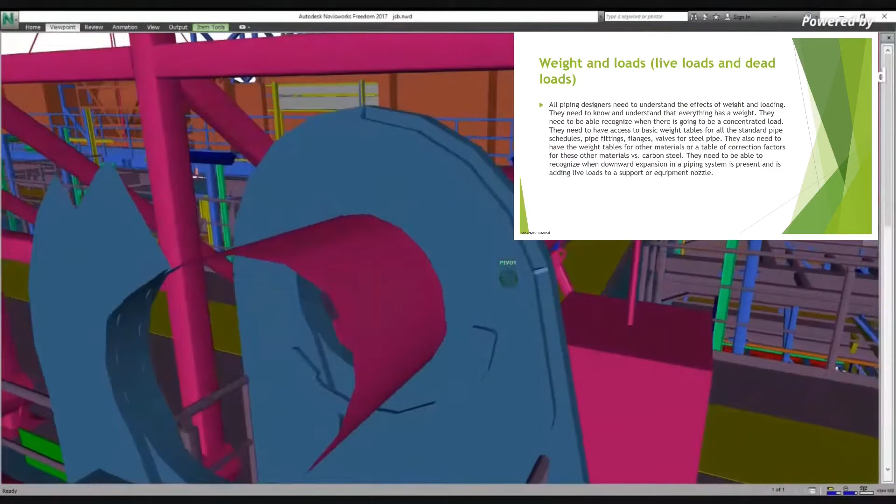The system is present and it's adding live loads to support or equipment nozzles.

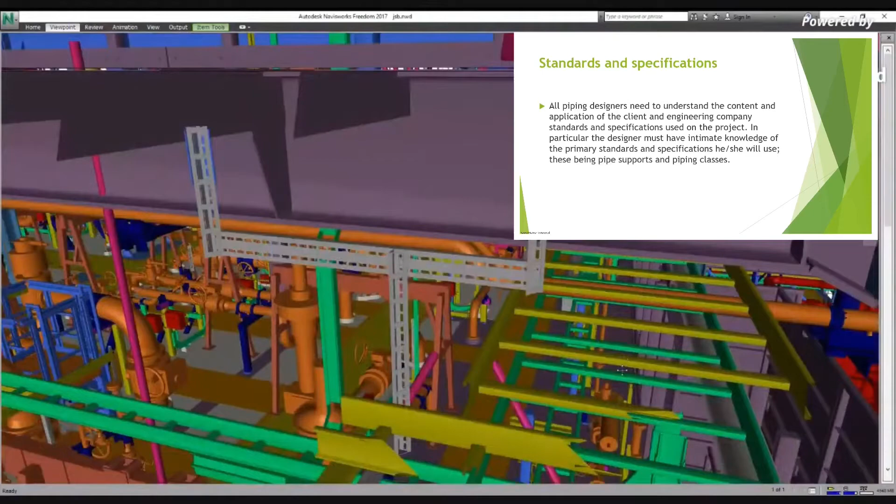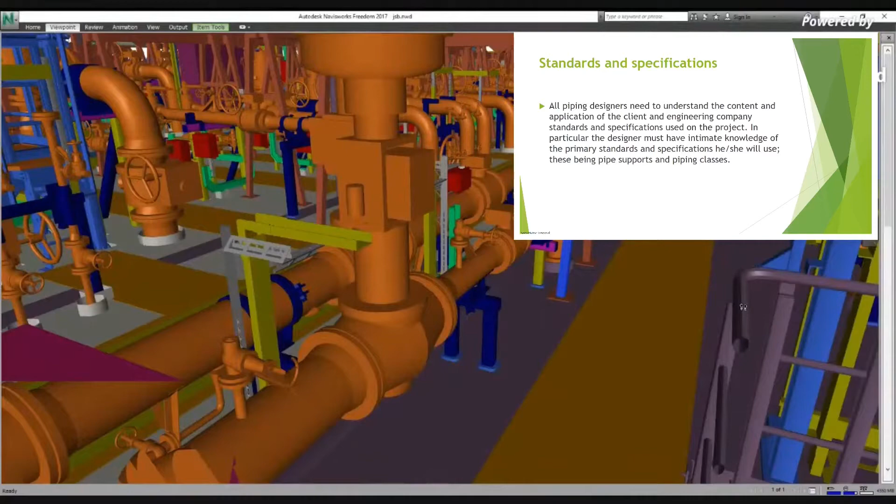The next one is standards and specifications. All piping designers need to understand the content and application of the client and engineering company standards and specifications used on the project. In particular, the designer must have intimate knowledge of the primary standards and specifications he or she will use, being pipe supports and piping classes.

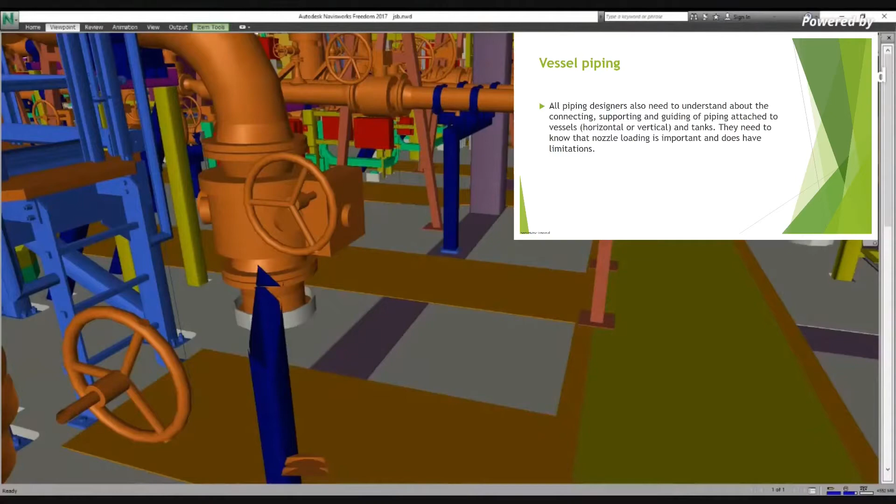Vessel piping. All piping designers also need to understand about the connecting, supporting, and guiding of piping attached to the vessel, horizontal or vertical, and the tanks. They need to know that nozzle loading is important and does have limitations.

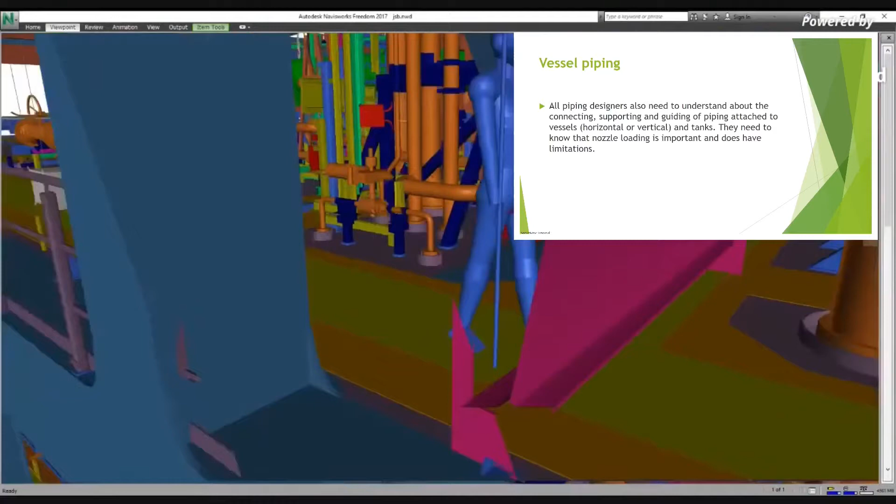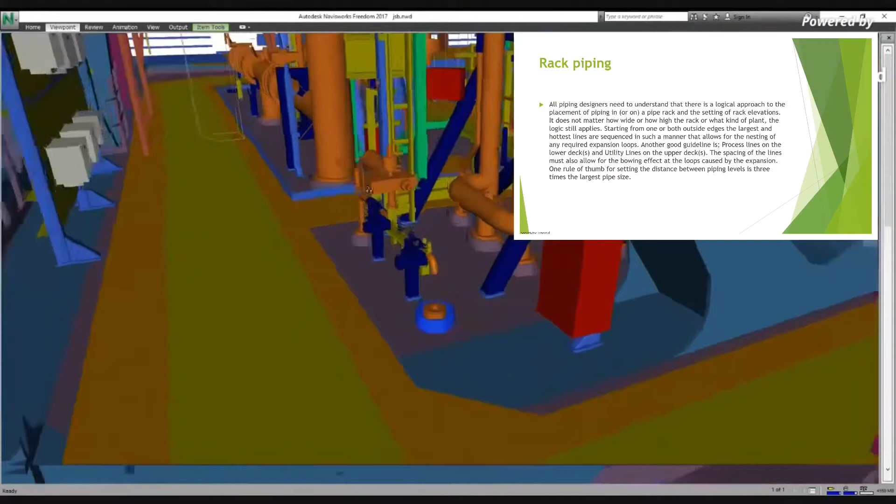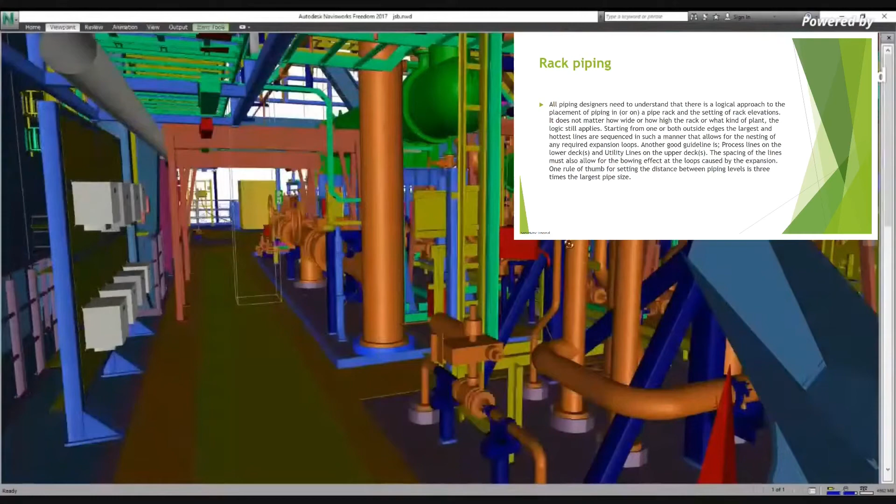Another good guideline is process lines on the lower decks, and utility lines on the upper decks. The spacing of the line must also allow for the bowing effect of the loop caused by expansion. One rule of thumb for setting the distance between piping levels is 3 times the largest pipe size.

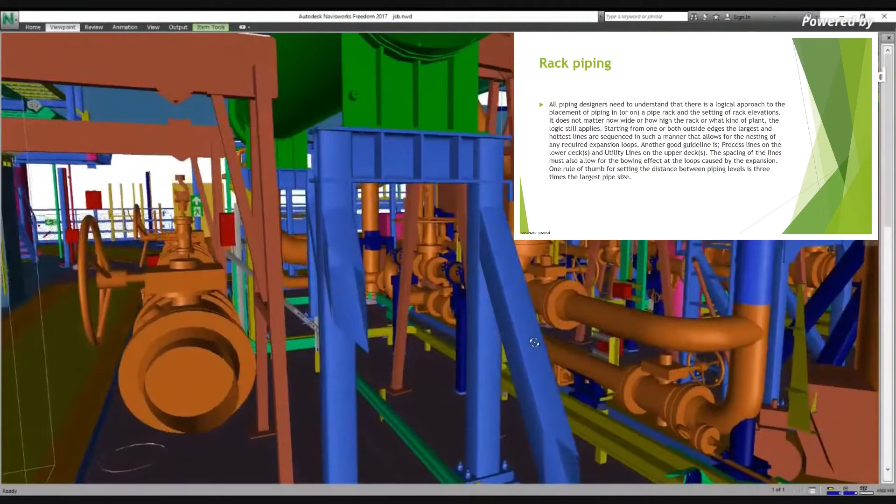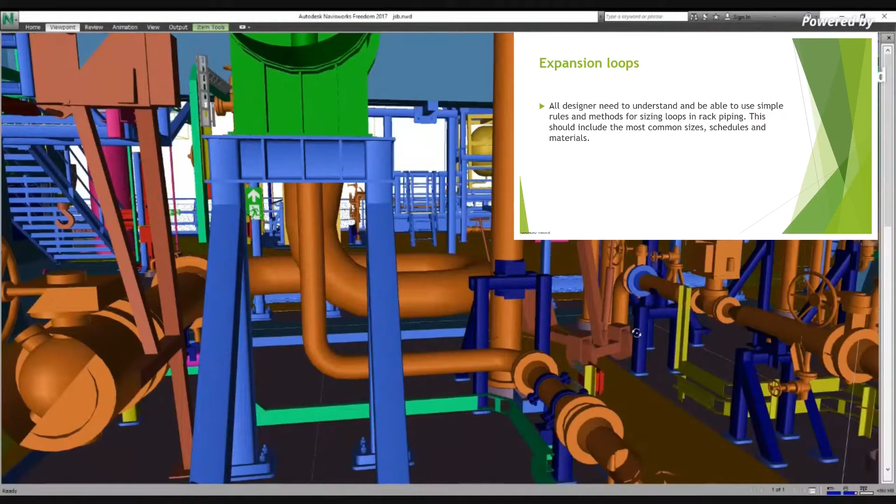Expansion loops. All designers need to understand and be able to use simple rules and methods for sizing loops in rack piping. This should include the most common sizes, schedules, and materials.

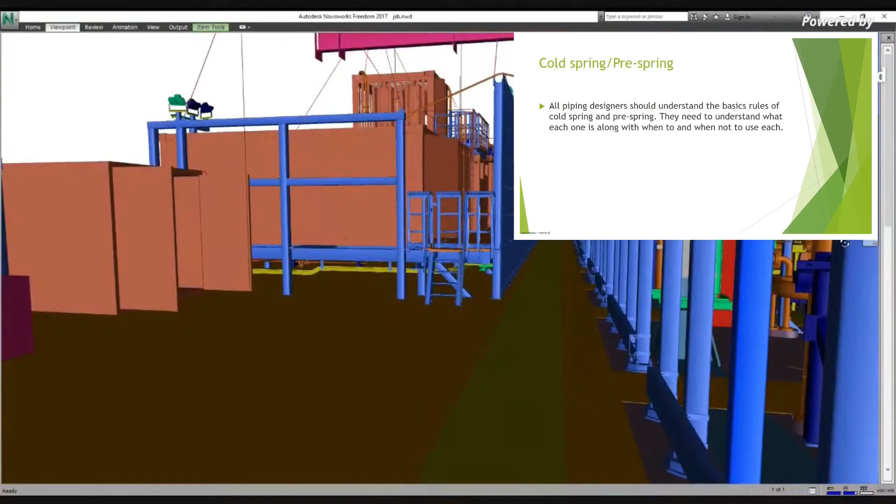Cold spring or pre-spring. All piping designers should understand the basic rules of cold spring and pre-spring. They need to understand what each one is, along with when to and when not to use it.

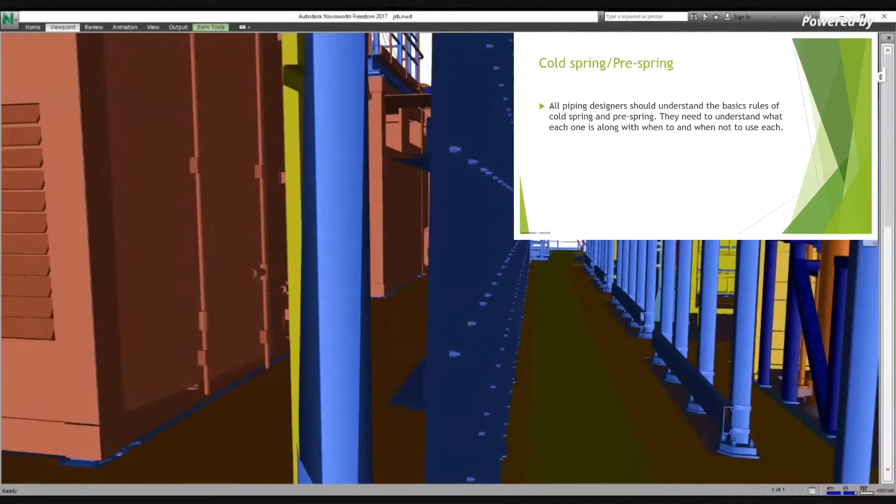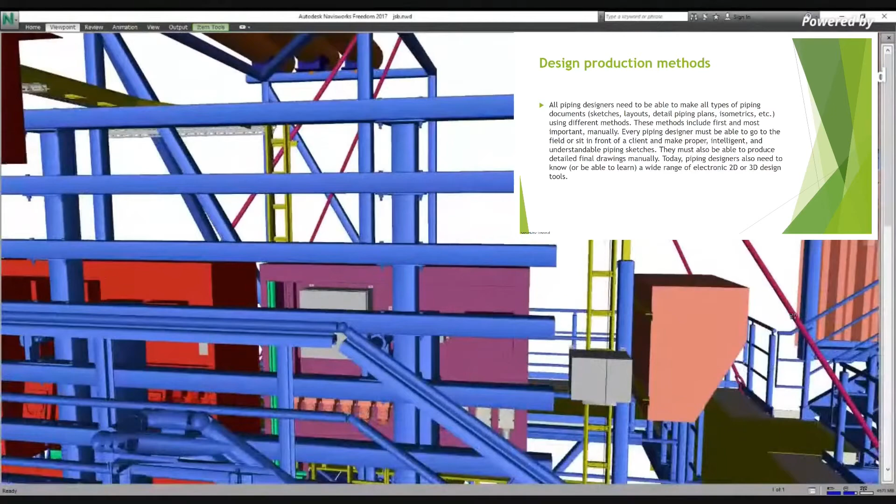Design production methods. All piping designers need to be able to make all types of piping documents, sketches, layouts, detailed piping plans, isometrics, etc., using different methods. These methods include, first and most important, manually. Every piping designer must be able to go to the field or sit in front of the client and make proper, intelligent, and understandable piping sketches. They must also be able to produce detailed final drawings manually.

Today, piping designers also need to know or be able to learn a wide range of electronic 2D or 3D design tools. Fabrication and construction methods.

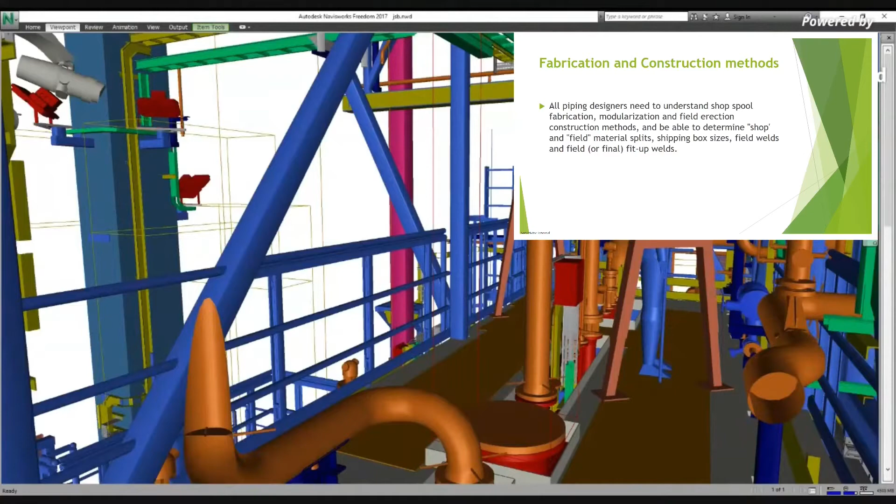All piping designers need to understand shop spool fabrication, modularization, and field erection construction methods, and be able to determine shop and field material splits, shipping box sizes, field welds, and field or final fit-up welding.

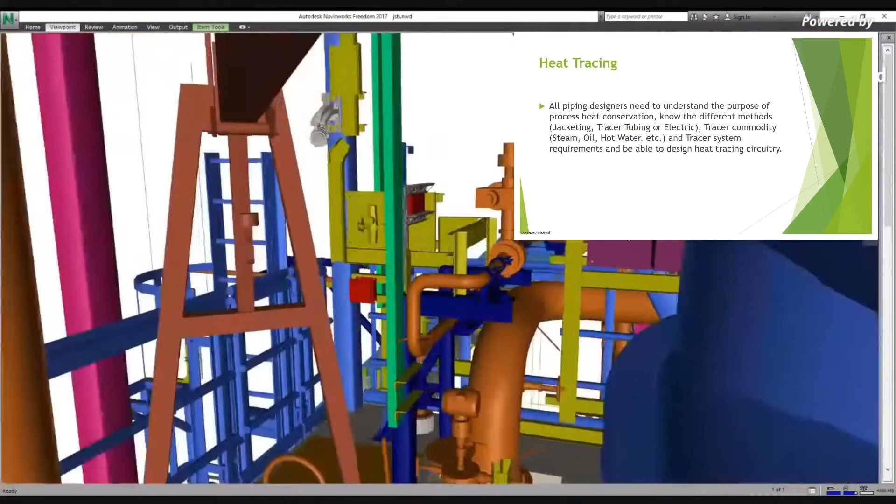Heat tracing. All piping designers need to understand the purpose of process heat conservation, know the different methods - jacketing, tracer tubing, or electric - tracer commodity, steam, oil, hot water, etc., and tracer system requirements, and be able to design heat tracing circuitry.

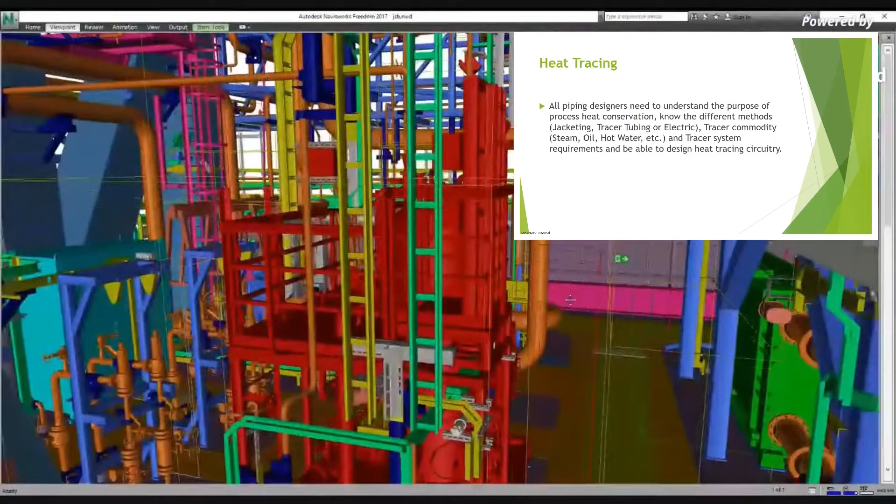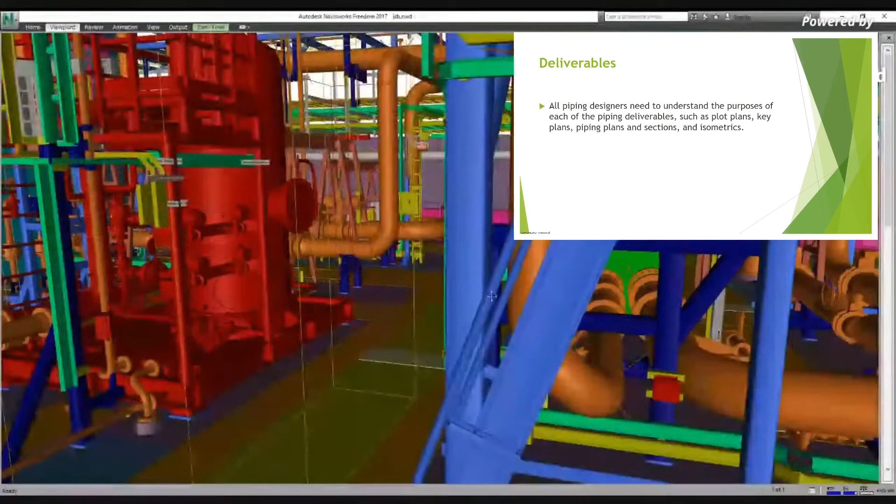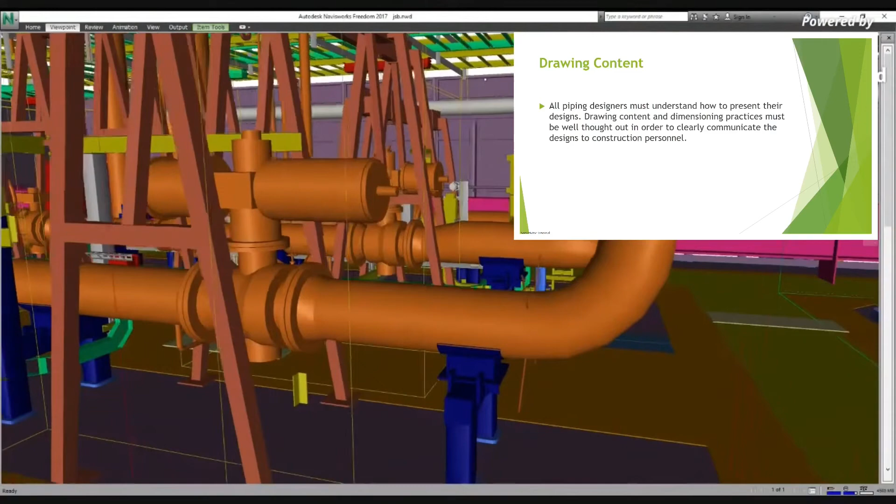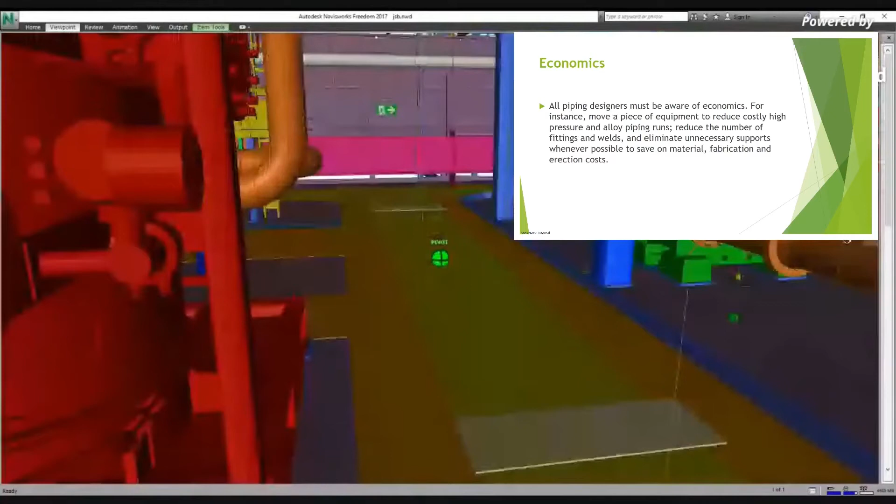Economics. All piping designers must be aware of economics. For instance, move a piece of equipment to reduce costly high pressure piping runs, reduce the number of fittings and welds, and eliminate unnecessary supports whenever possible to save on material, fabrication, and erection costs.